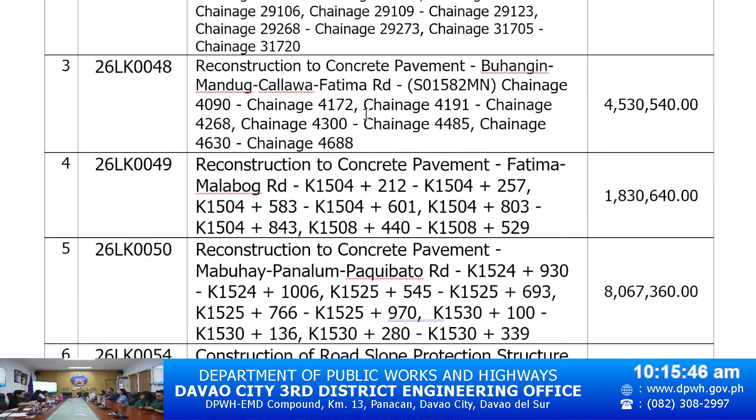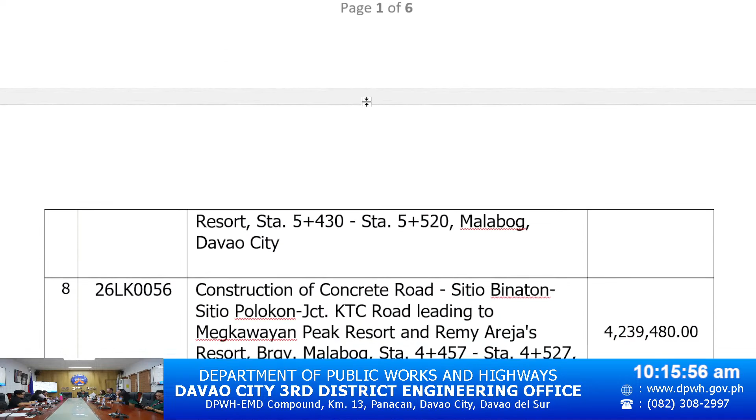The following are subject for civil works pre-bid conference this morning: 26LK0046, 26LK0047, 26LK0048, 26LK0049, 26LK0050, 26LK0054, 26LK0055, and 26LK0056.

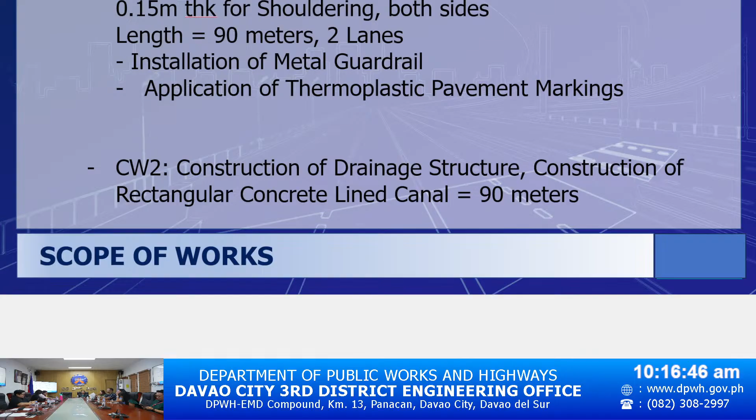Okay, let's proceed. For the first project, 26LK0046, Preventive Maintenance of Road, Concrete Reblocking, Mamay Bypass Road, S01585MN, Chainage 082 to 100, Chainage 155 to 160, Chainage 444 to 467, Chainage 735 to 744, Chainage 823 to 904. Project duration of 45 calendar days, allocation of 2,307,000 pesos and an ABC amount of 2,260,860 pesos.

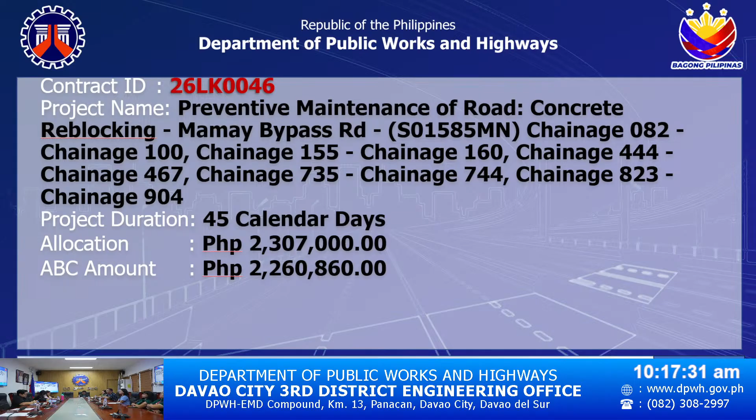Scope of works of the project: concrete reblocking, 0.28 meter thick PCCP, 14 days curing time, with a length of 235 meters, varies between 1 and 2 lanes. Removal of existing 0.28 meter thick PCCP, removal of existing solar studs, application of thermoplastic pavement markings.

For the next project, 26LK0047, Preventive Maintenance of Road, Concrete Reblocking, Buhangin-Mandug-Callawa-Fatima Road, S01582MN, Chainage 2780 to 2810, Chainage 11012 to 11104, Chainage 16043 to 16059, Chainage 17896 to 17912, Chainage 19613 to 19655, Chainage 19984 to 19998, Chainage 20462 to 20475, Chainage 21017 to 21030.

Chainage 21459 to 21468, Chainage 21488 to 21515, Chainage 22461 to 22486, Chainage 23399 to 23412, Chainage 25443 to 25479, Chainage 25512 to 25521, Chainage 27555 to 27580, Chainage 28373 to 28382, Chainage 28698 to 28713, Chainage 28715 to 28720.

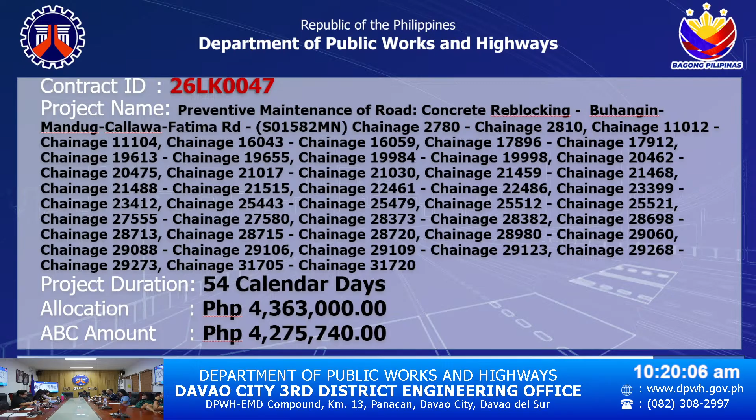Chainage 28980 to 29060, Chainage 29088 to 29106, Chainage 29109 to 29123, Chainage 29268 to 29273, Chainage 31705 to 31720. Project duration of 54 calendar days. Allocation of 4,363,000 and an ABC amount of 4,275,740 pesos.

Scope of works of the project is concrete reblocking, 0.28 meter thick PCCP, 14 days curing time, with a length of 569 meters, varies between 1 and 2 lanes. Removal of existing 0.28 meter thick PCCP.

Next project is 26LK0048, Reconstruction to Concrete Pavement, Buhangin-Mandug-Callawa-Fatima Road, S01582MN, Chainage 4090 to 4172, Chainage 4191 to 4268, Chainage 4300 to 4485, Chainage 4630 to 4688. Project duration is 56 calendar days. Allocation of 4,623,000 and an ABC amount of 4,530,540 pesos.

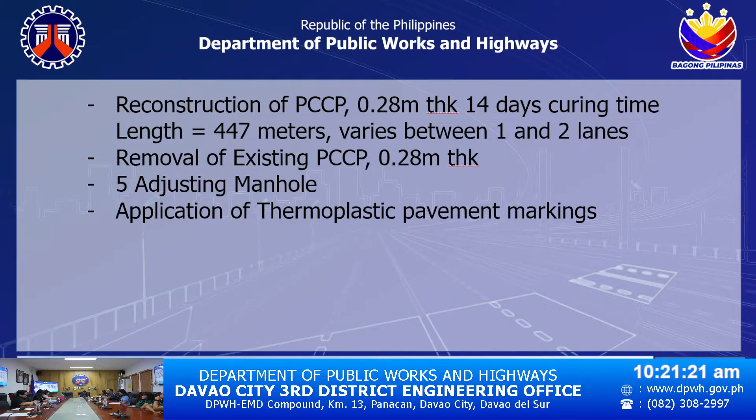Scope of works of the project: reconstruction of PCCP, 0.28 meter thick, 14 days curing time, with a length of 447 meters, varies between 1 and 2 lanes. Removal of existing PCCP 0.28 meter thick, 5 adjusting manhole, and application of thermoplastic pavement markings.

Next project, 26LK0049, Reconstruction to Concrete Pavement, Fatima Malabog Road, kilometer 1504+212 to 1504+257, kilometer 1504+583 to 1504+601, kilometer 1504+803 to 1504+843, kilometer 1508+440 to 1508+529. Project duration is 36 calendar days. Allocation is 1,868,000 and an ABC amount of 1,830,640 pesos. Scope of works of the project is reconstruction of PCCP, 0.28 meter thick, 14 days curing time.

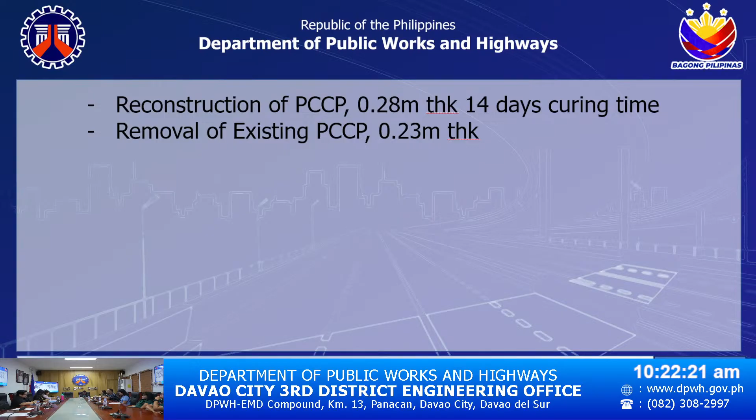Removal of existing PCCP 0.23 meter thick. For next project, 26LK0050, Reconstruction to Concrete Pavement, Mabuhay-Panalum-Paquibato Road, kilometer 1524+930 to 1524+1006, kilometer 1525+545 to 1525+693, kilometer 1525+766 to 1525+970, kilometer 1530+100 to 1530+136, kilometer 1530+280 to 1530+339.

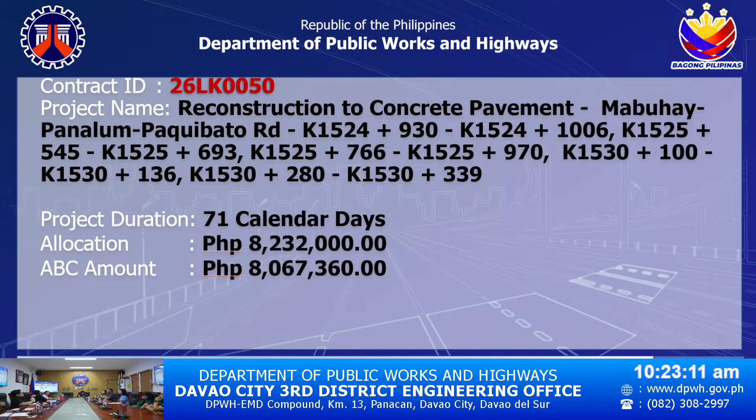Project duration of 71 calendar days. Allocation of 8,232,000 and ABC amount of 8,067,360 pesos. Scope of works of the project: reconstruction of PCCP, 0.28 meter thick, 14 days curing time, with a length of 523 meters for 2 lanes.

Removal of existing PCCP, 0.28 meter thick, and application of thermoplastic pavement markings.

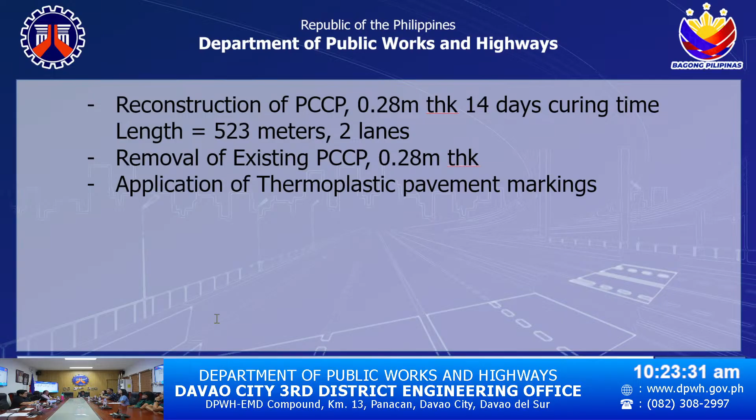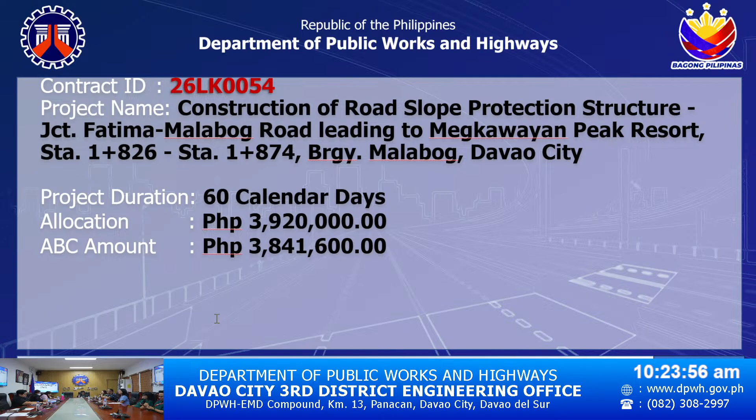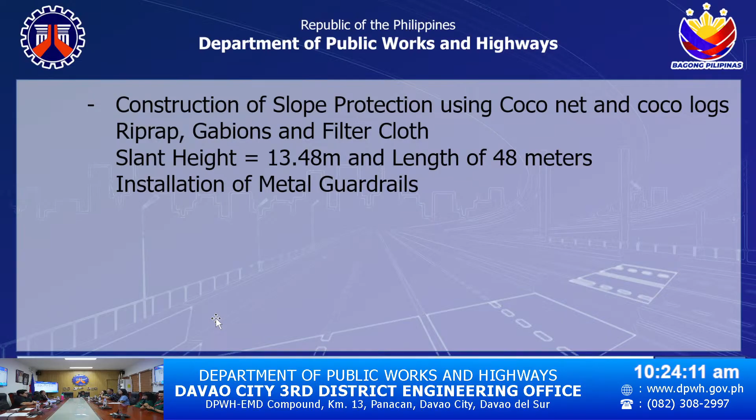Next project, 26LK0054, construction of road slope protection structure, junction Fatima Malabog Road, leading to Megkawayan Peak Resort, Station 1 plus 826 to Station 1 plus 874, Barangay Malabog, Davao City. Project duration of 60 calendar days, allocation of 3,920,000 pesos with an ABC amount of 3,841,600 pesos. Scope of the project: construction of road slope protection using coco net and coco logs, riprap, gabions, and filter cloth.

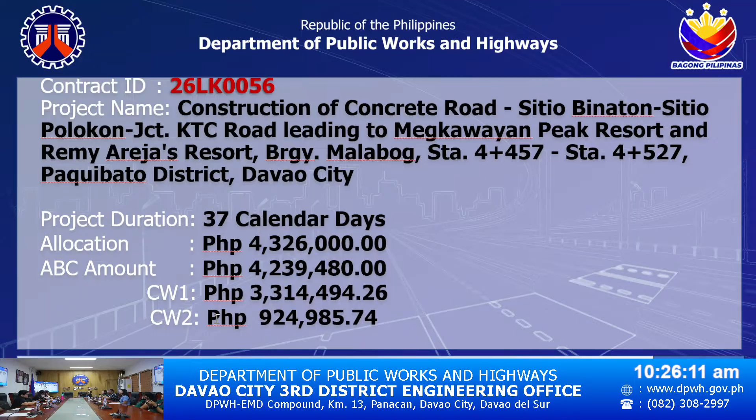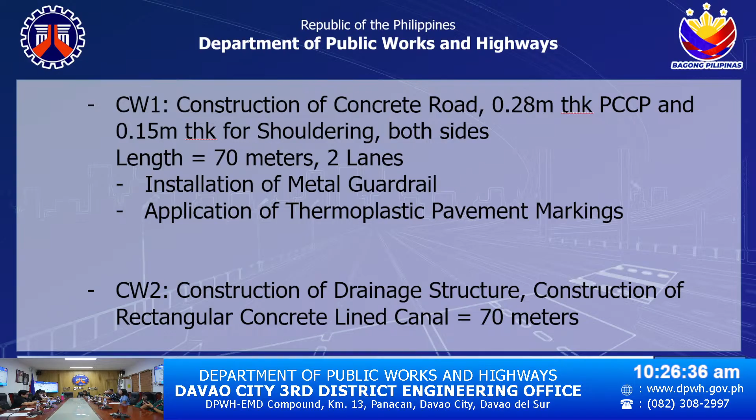Scope of the project, CW1: construction of concrete road, 0.28 meter thick, and 0.15 meter thick for shouldering on both sides with a length of 70 meters for 2 lanes. Installation of metal guardrail, application of thermoplastic pavement markings. For CW2, construction of drainage structure, construction of rectangular concrete lined canal with a length of 70 meters.

That's all, ma'am. Thank you.

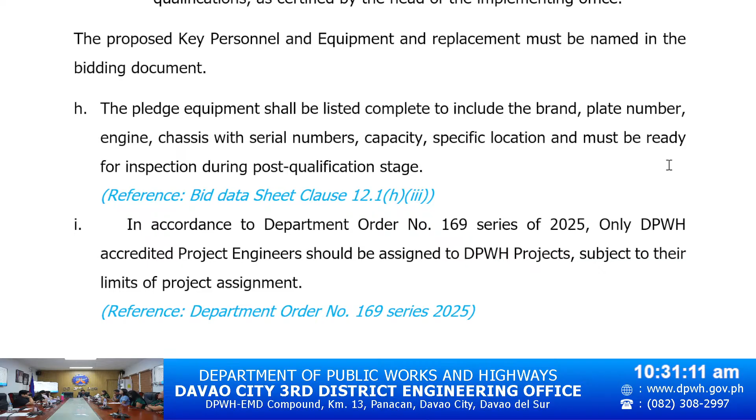Letter I. In accordance with Department Order number 169 series of 2025, only DPWH accredited project engineers should be assigned to DPWH projects, subject to their limits of project assignment. Reference DO number 169 series 2025.

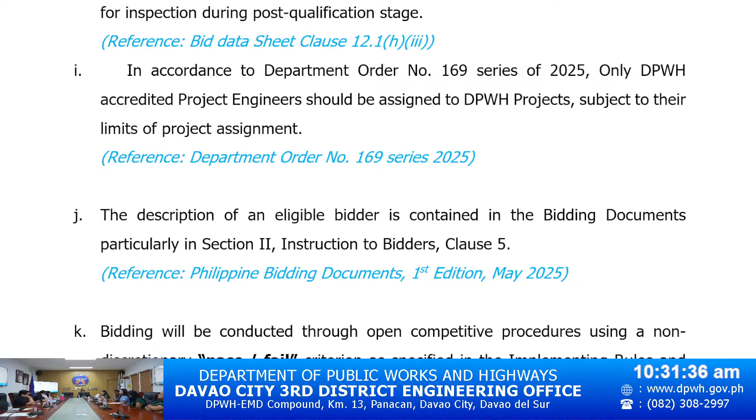Letter J. The description of an eligible bidder is contained in the bidding documents, particularly in Section 2, Instruction to Bidders, Clause 5. Reference, Philippine Bidding Documents, 1st edition, May 2025.

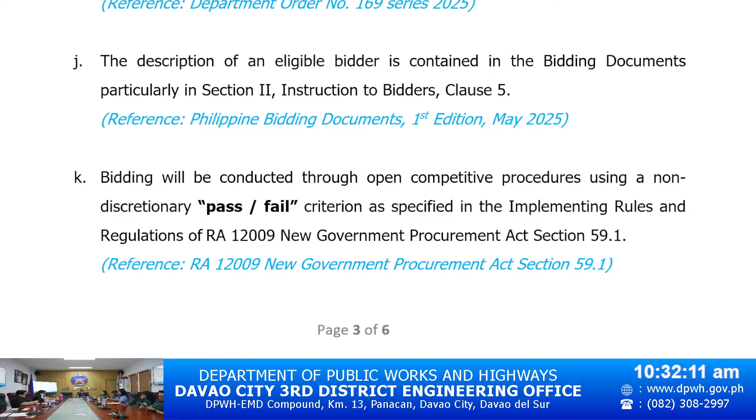Letter K. Bidding will be conducted through open competitive procedures using a non-discretionary pass-fail criterion as specified in the implementing rules and regulations of Republic Act 12009, the New Government Procurement Act, Section 59.1. Reference, RA 12009, New Government Procurement Act, Section 59.1.

Letter L. Detailed evaluation using lowest calculated bid and lowest calculated responsive bid shall be evaluated by the Technical Working Group for recommendation of award.

Letter M. All bids must be accompanied by a bid security in any of the acceptable forms and in the amount stated in Section 2, Instruction to Bidders, Clause 16. Reference, Philippine Bidding Documents, 1st edition, May 2025.

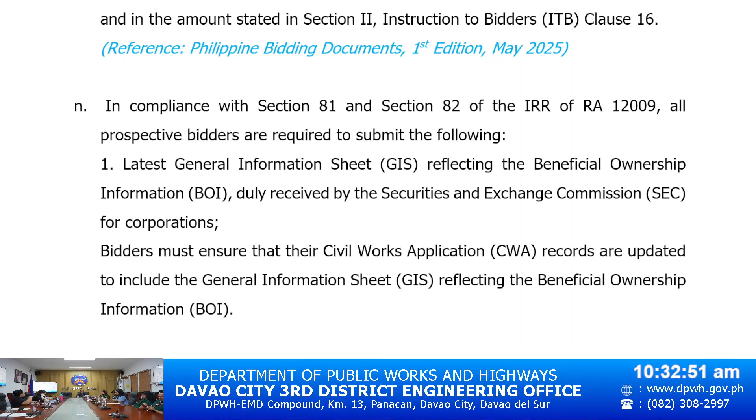Letter N. In compliance with Section 81 and Section 82 of the IRR of Republic Act 12009, all prospective bidders are required to submit the following: 1. Latest General Information Sheet, or GIS, reflecting the beneficial ownership information duly received by the Securities and Exchange Commission for corporations. Bidders must ensure that their Civil Works Application or CWA records are updated to include the GIS, the general information sheet reflecting the beneficial ownership information.

Letter O. Each page of the document shall be signed by the bidder or a duly authorized person. If corporation, a secretary certificate should be attached.

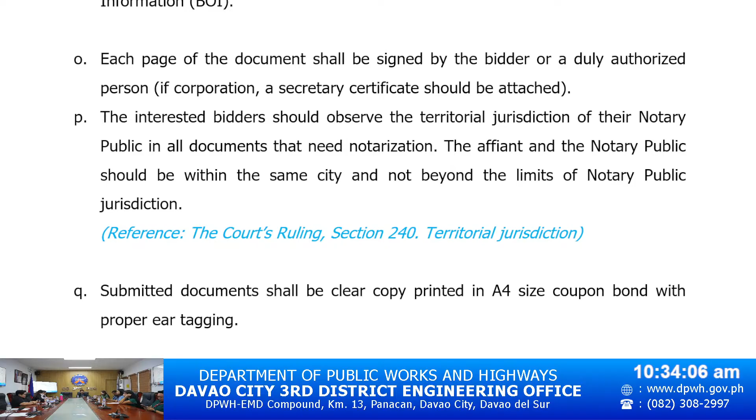Letter P. The interested bidders should observe the territorial jurisdiction of their notary public in all documents that need notarization. The affiant and the notary public should be within the same city and not beyond the limits of notary public jurisdiction. Reference the court's ruling, section 240, territorial jurisdiction.

Letter Q. Submitted documents shall be clear copies, printed on A4 size bond paper with proper ear tagging.

Letter R. Bidders are required to submit the computation of NFCC, which must be at least equal to the ABC to be bid. In order to conduct proper counter-checking of NFCC during the post-qualification stage, bidders are required to submit all outstanding or uncompleted portions of the projects under ongoing contracts, including awarded contracts yet to be started. Reference Republic Act 12009, New Government Procurement Act Section 52.1.4.1.4.

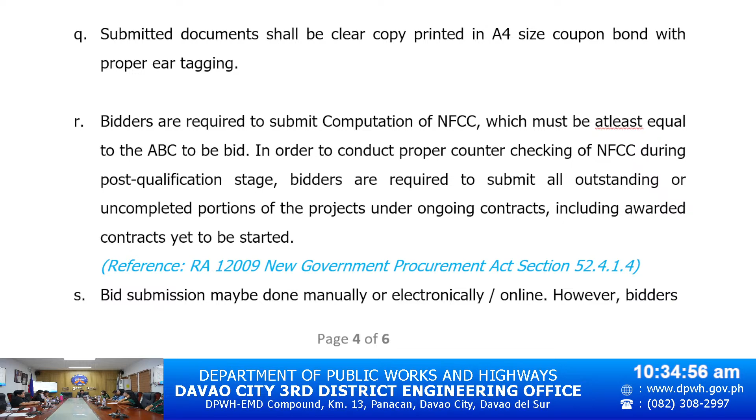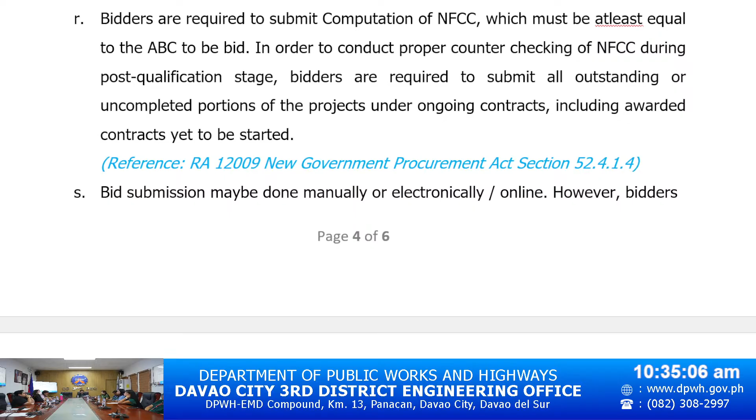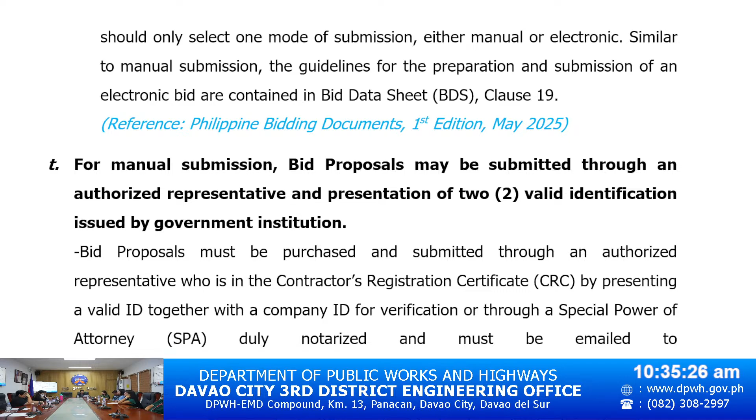Letter S. Bid submission may be done manually or electronically online. However, bidders should only select one mode of submission, either manual or electronic. Similar to manual submission, the guidelines for the preparation and submission of an electronic bid are contained in the Bid Data Sheet, Clause 19. Reference Philippine Bidding Documents, 1st edition, May 2025.

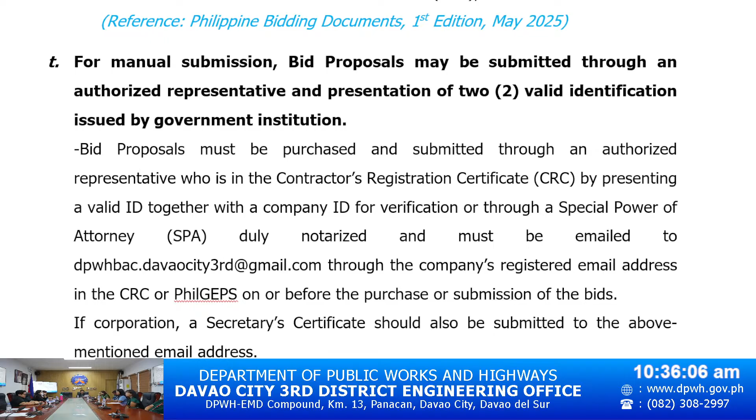For manual submission, bid proposals may be submitted through an authorized representative with presentation of two valid IDs issued by government institutions. Bid proposals must be purchased and submitted through an authorized representative named in the contractor's registration certificate, by presenting a valid ID together with a company ID for verification, or through a special power of attorney duly notarized, and must be emailed to dpwhback.davaocitythird@gmail.com through the company's registered email address in the CRC or PhilGEPS on or before the purchase or submission of the bids. If corporation, a secretary certificate should also be submitted to the above-mentioned email address.

Letter U. Bids must be duly received by the BAC secretariat at the address stated for manual submission, or at electronic bids underscore Davao City 3 at dpwh.gov.ph for electronic submission, on or before March 17, 2026 at 10 a.m. Bid opening shall be on March 17, 2026 after the deadline for submission of bids at the conference room, DPWH Davao City 3rd District Engineering Office, through video conferencing or webcasting via the YouTube account DPWH Davao City 3rd DEO Procurement LS.

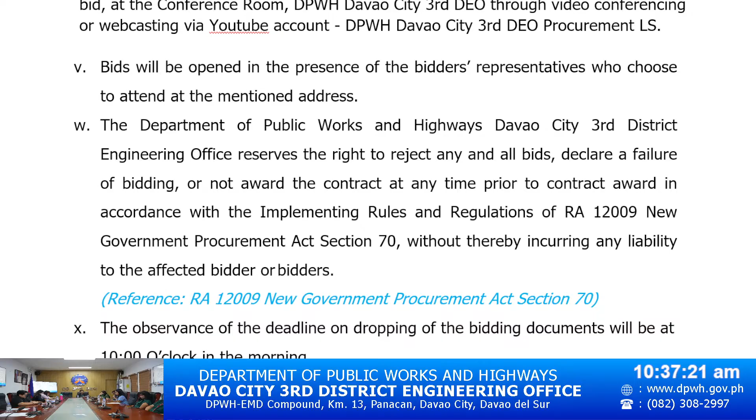Letter V. Bids will be opened in the presence of the bidders' representatives who choose to attend at the mentioned address. Letter W. The Department of Public Works and Highways, Davao City 3rd District Engineering Office reserves the right to reject any and all bids, declare a failure of bidding, or not award the contract at any time prior to contract award, in accordance with the implementing rules and regulations of Republic Act 12009, New Government Procurement Act, Section 70, without thereby incurring any liability to the affected bidder or bidders. Reference RA 12009, New Government Procurement Act, Section 70.

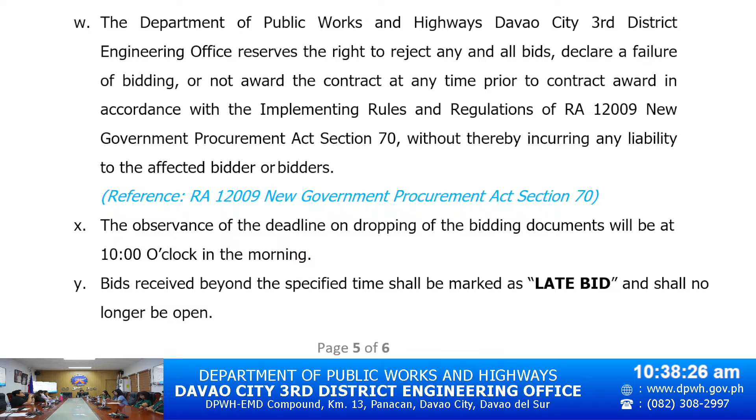Letter X. The observance of the deadline on dropping of bidding documents will be at 10 o'clock in the morning. Letter Y. Bids received beyond the specified time shall be marked as late bids and shall no longer be opened. Letter Z. Observers who wish to acquire any documents related to the bidding may do so by signing a confidentiality agreement as mandated.

Are there any questions from the observers and live streaming viewers? None? If there is none, I move to adjourn the pre-bid conference.